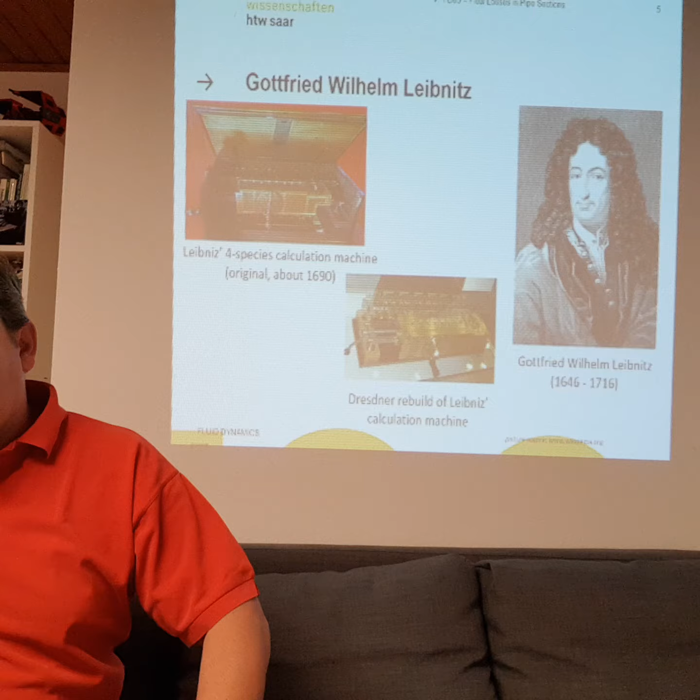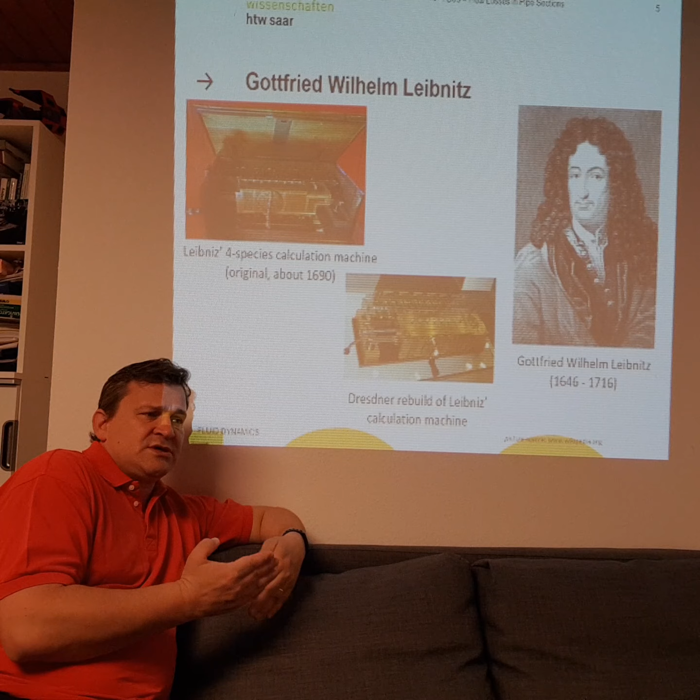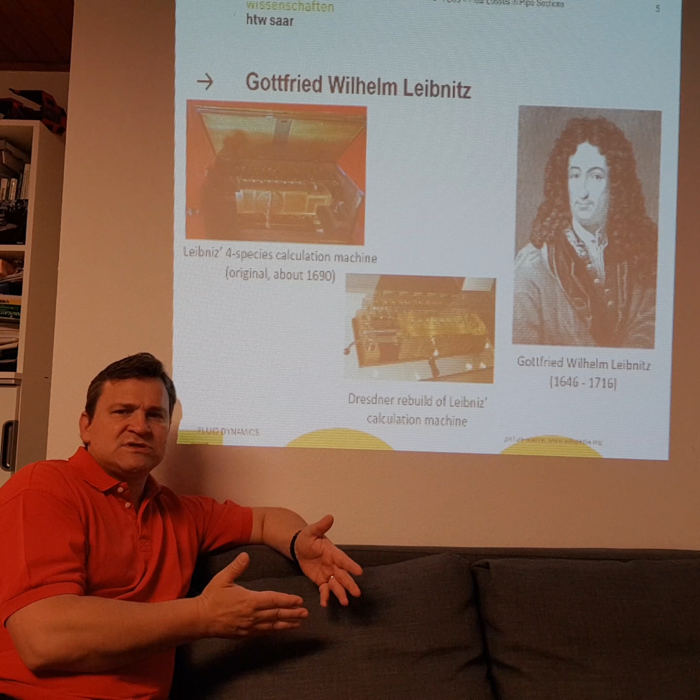I also want to mention Gottfried Wilhelm Leibniz, because he made the same discovery as Bernoulli. He also discovered Bernoulli's law, but it is named after Bernoulli. For example, Newton's law is named after Newton because he discovered it, but sometimes other scientists at the same time discovered the same effects in nature and formulated the same laws, so we should also mention them.

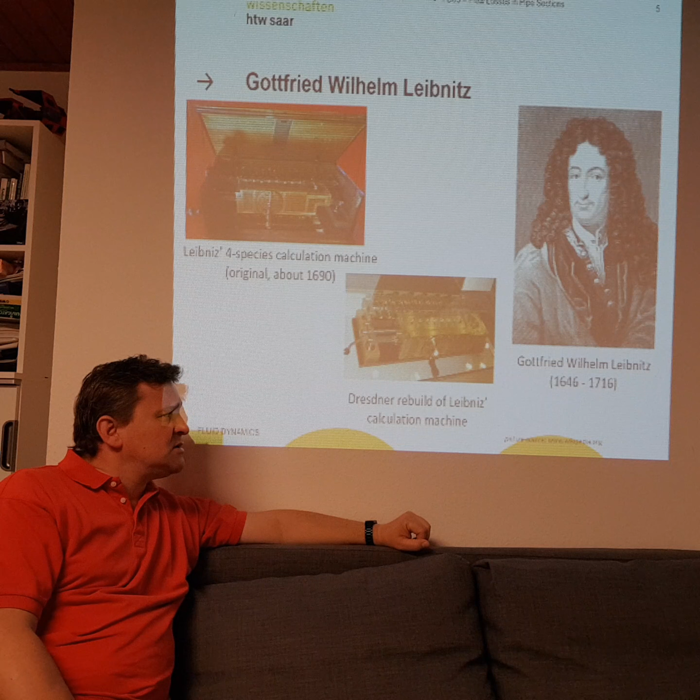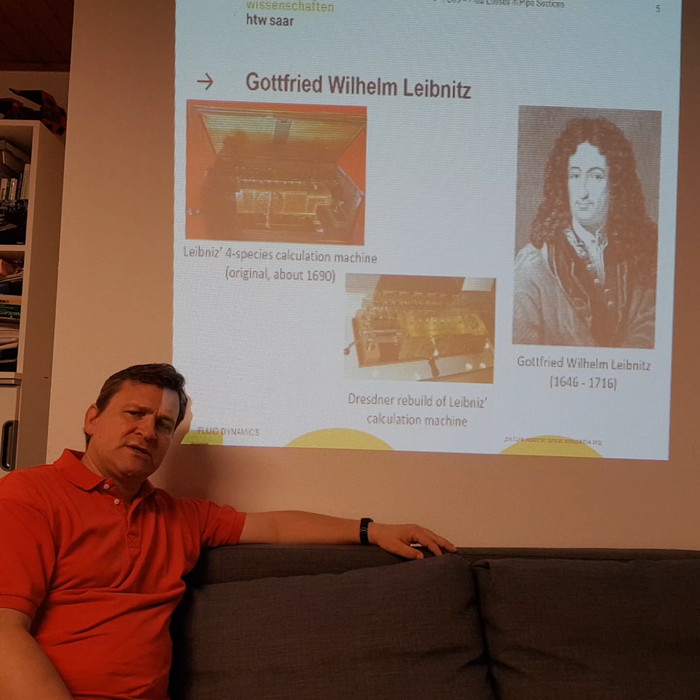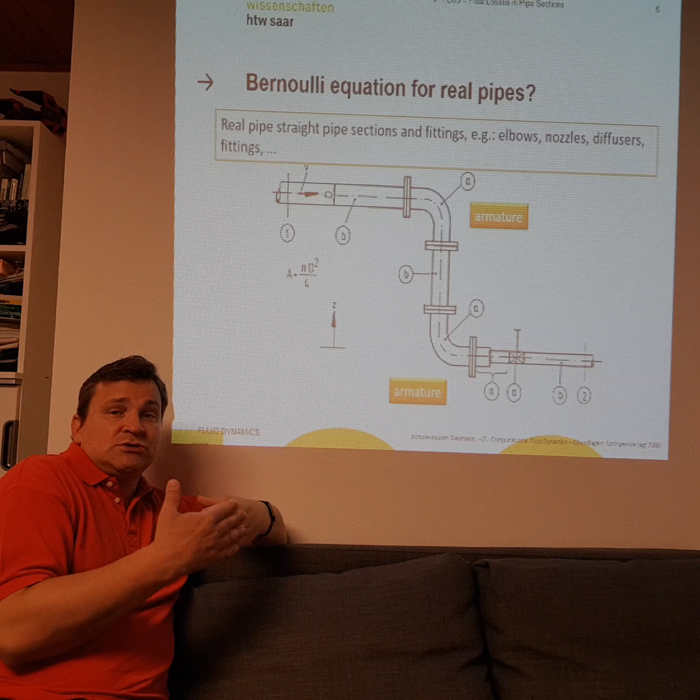But if you closely look at this simple pipe system, you will see elbows, armatures, and different pipe diameters, and all these constructional features cause a pressure drop inside the fluid.

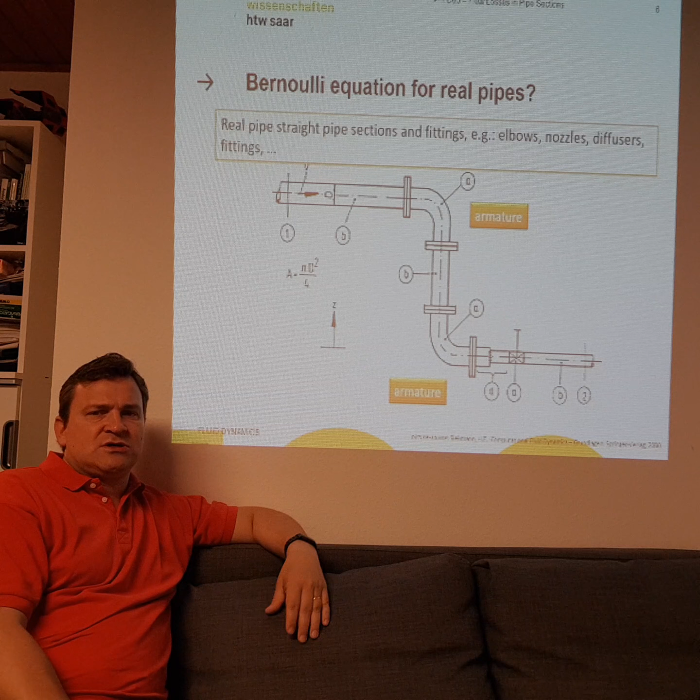This pressure drop is a loss of energy, so you have to look a bit more closely at Bernoulli's law and formulate it a bit differently. You have to add a loss term to the energy equation, and that's what we now want to do. It gets a bit more complicated to explain.

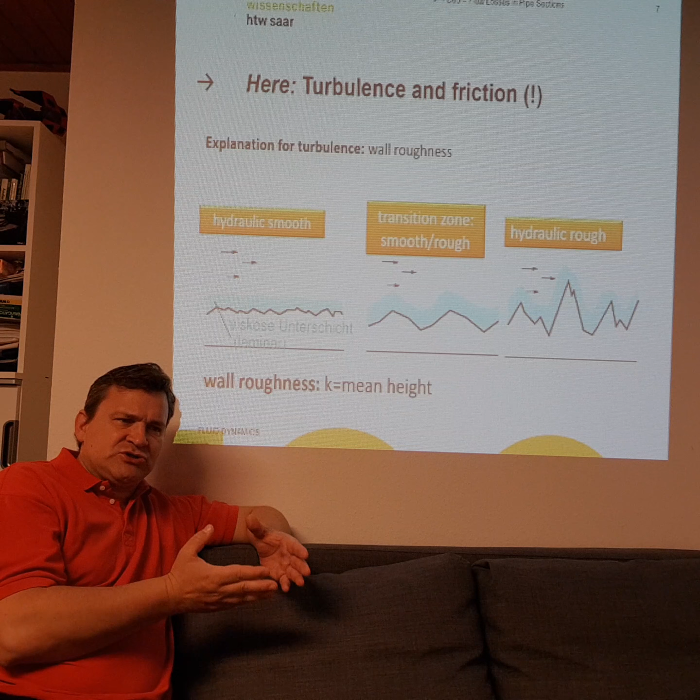You have the armatures, the valves, the changes of diameter, and all these armatures or valves cause a pressure drop. So we need a term for this kind of pressure drop.

But we will also have an additional pressure drop caused by the roughness of the walls. In the last chapter I taught you about smooth walls, and also in ANSYS CFX we only did calculations for smooth walls so far.

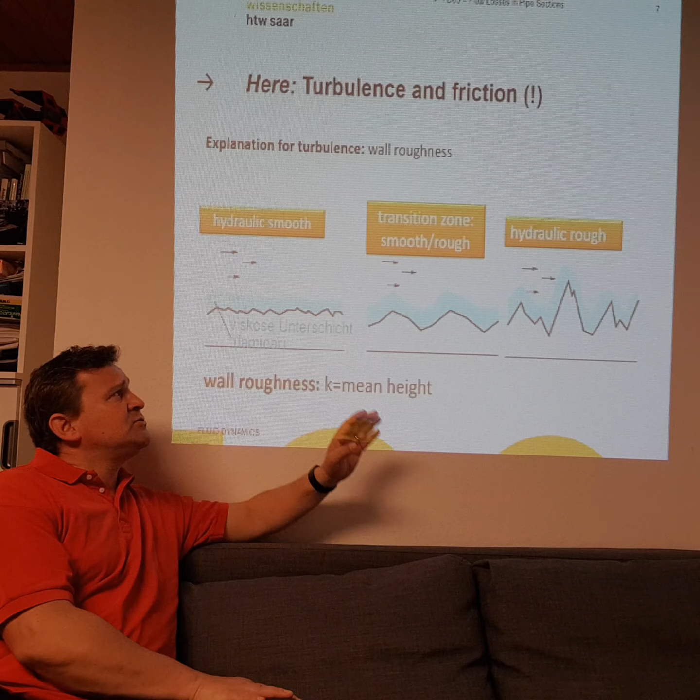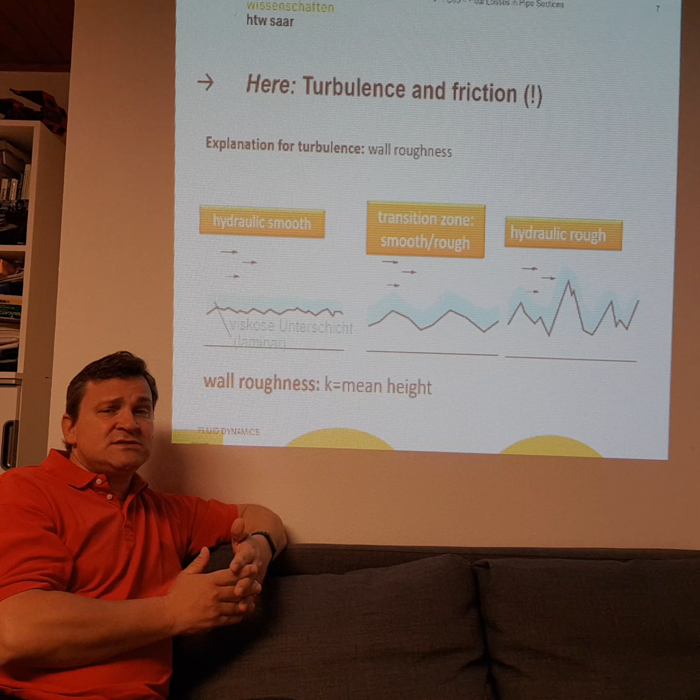But if you look closely at the walls of a pipe system, for example, you can have concrete in a wastewater system, and the walls can be really rough. You can have stones or edges on these pipes, and this roughness can also cause pressure drop.

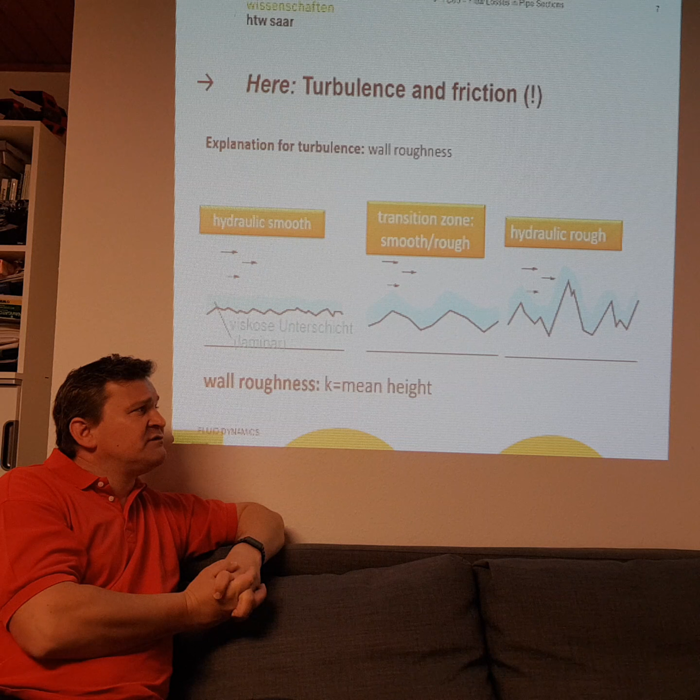It can cause a loss of flow energy, but there's something more I have to explain: it will only cause a loss of energy if we have turbulent flows. Now, what are turbulent flows?

You can have laminar flow fields, where the fluid flows without any disturbance, without any big gradient in the velocities. But you can also have swirls and turbulence inside the fluid, and these swirls and turbulences will cause pressure drop if they interact with rough walls or any armatures inside the pipes.

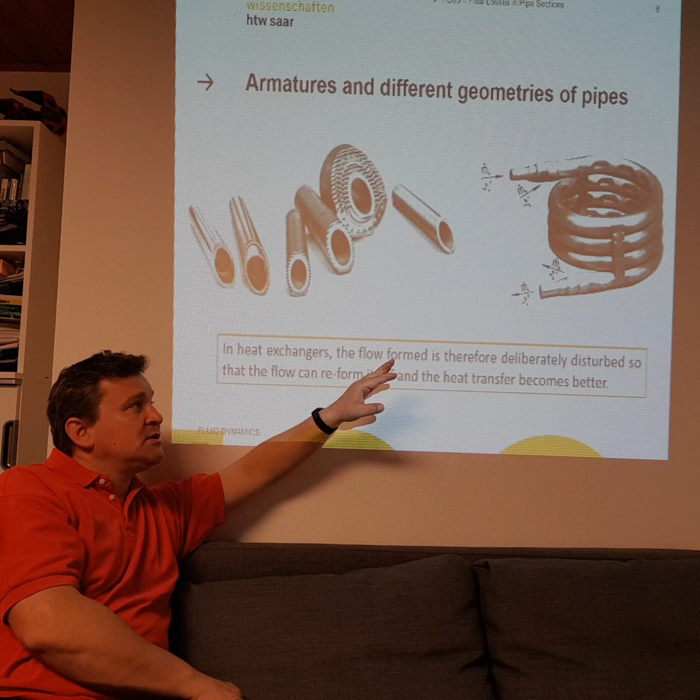And here on the right side you see a pipe for heat transfer. You will have a mass flow of warm water that enters the pipe, and you will place this, let's call it a snail, inside a pot of cold water, for example, and then you can heat up the water.

If you look closely, maybe if the video is not good enough, look at the slides. If you look closely at this pipe, you can see there are small bumps inside it, made to force turbulence inside the fluid flow.

So you will get better heat transfer, but on the other side you will get more pressure drop, and you have to pay for this pressure drop. It is expensive. Pressure drop always costs money.

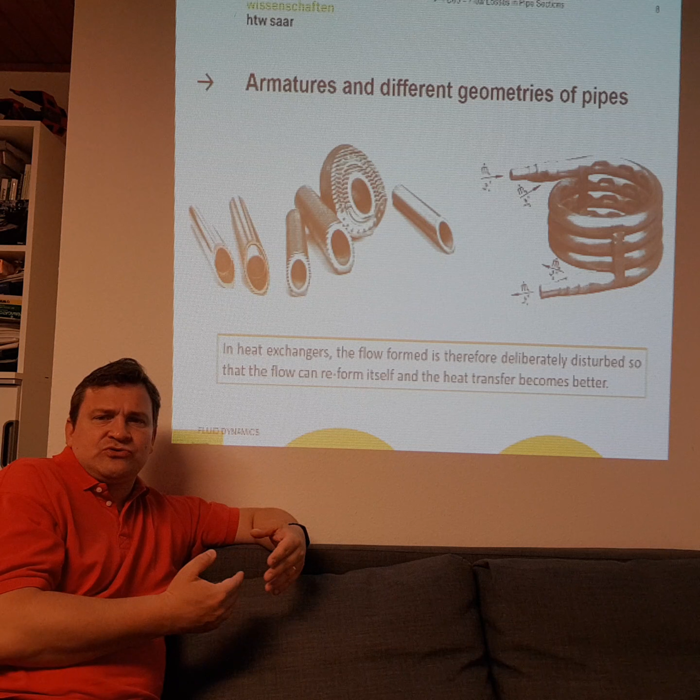For example, you will need a bigger, more expensive pump if you have a pipe with a higher pressure drop. So you have to pay for it, and you need more energy to get higher pressures at the entry, because you will have higher losses in the system.

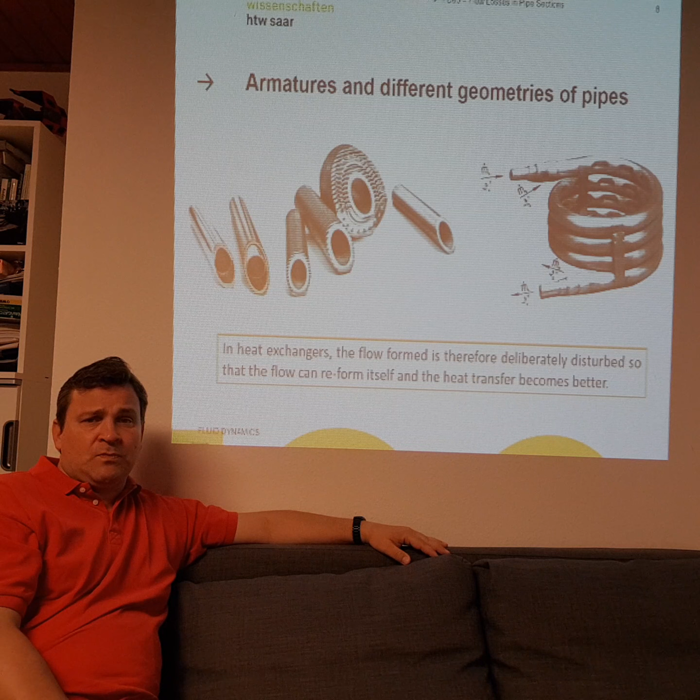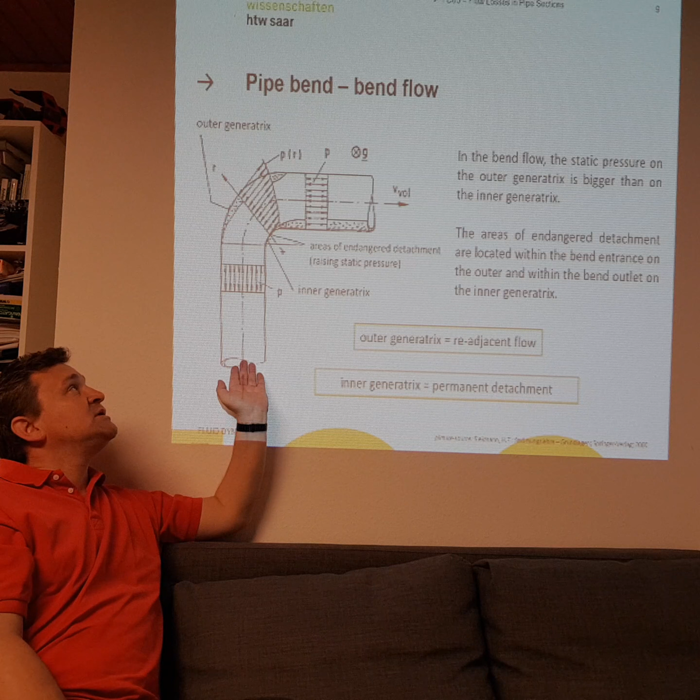So here you see a sketch of the elbow. You enter the water into this elbow system, and the flow will go around the edge, around the elbow, and after the elbow you will always have turbulent regions where turbulence happens. These regions will cause high pressure drops, and because there is a pressure drop, they will also produce regions of low pressure, and that's something I always try to teach you.

Also Bernoulli's law acts in these small regions. If you have high swirls and high turbulence and high mixing velocities, the pressure will go down, and you will sometimes have really narrow pressures in this region. In a normal water system you have around 3 bars, but in this region you can have much lower pressures. And what happens if you have water and the pressure gets lower than 0?

Will you have negative pressures? No, of course. Negative pressures do not exist. If the pressure goes into the region of 0 and goes lower than the saturation pressure, and the saturation pressure of water is really narrow, it's only about 2100 pascals, that's nearly 0 bar. And if the pressure goes lower than this level, you will have a new physical effect.

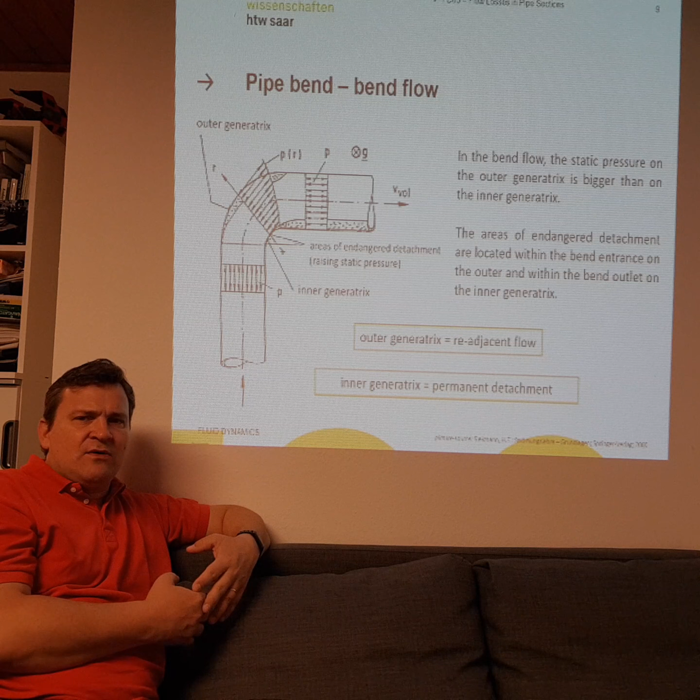You will have the effect of cavitation, and cavitation means you get bubbles, you get holes in the liquid, and it will be filled with gas, for example with water as a gas. You will see these bubbles, and that's an effect I want to talk about a bit later again, but it's a really important effect.

So if you calculate pressures with Bernoulli's law and you get pressures lower than 0 in a region, it is not physical. You can calculate this with Bernoulli's law and you will get negative results for the pressures. It can happen, it's only mathematics, but it is not physically true. In this region where you get negative pressures, the physics will change, and you will get an additional effect of bubble building, and that's something I have to look at closely in the next slides.

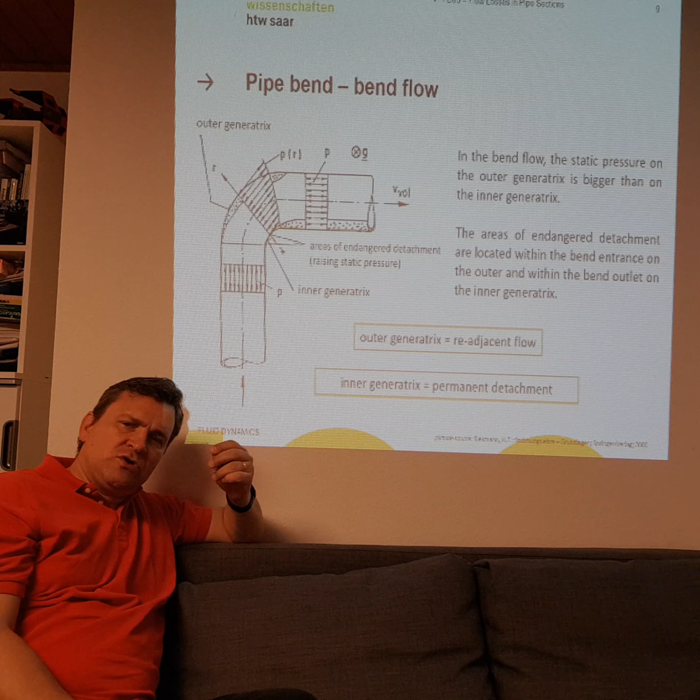Okay, and always when I try to explain something, I love to take CFD results, and there is a really interesting CFD result called the elbow case. Maybe we do this exercise also in CFX. That's a result from a famous open source CFD code called OpenFoam. I also give lectures in OpenFoam, and that's a really famous example.

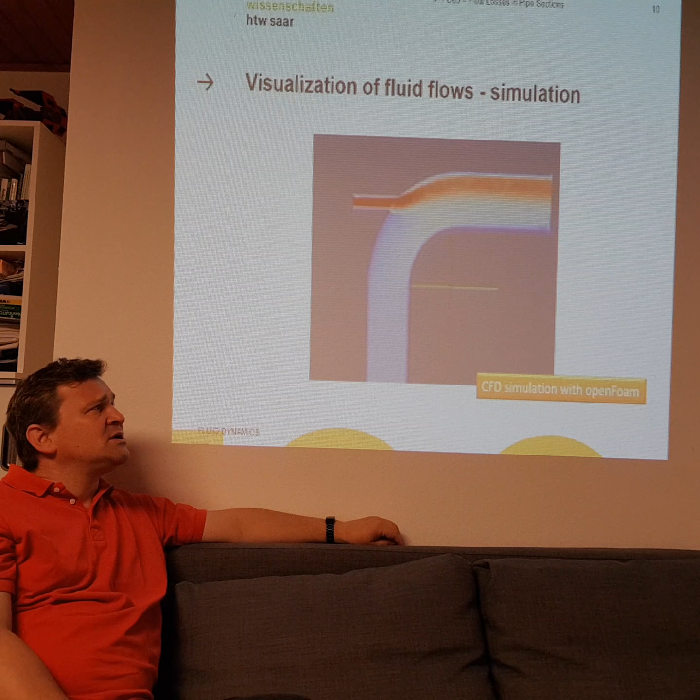It's a so-called elbow example, and here you see cold water that enters from the bottom, and there's a small additional pipe, and water enters from this additional pipe. At the exit of the elbow pipe, there will be mixing between the red hot water and the blue cold water, and you will see turbulence effects. In this simulation the mesh was not so fine, so you can't see any big swirls, but you see the mixing of the red, white, and blue colored water.

And I always try to build up a bit. I'm a fan of building up these experiments, and what I did here was the first version of my model. I built a small channel with water and a small pipe, and I injected some ink with blue color, and if you look closely you can see how the ink enters the pipe system.

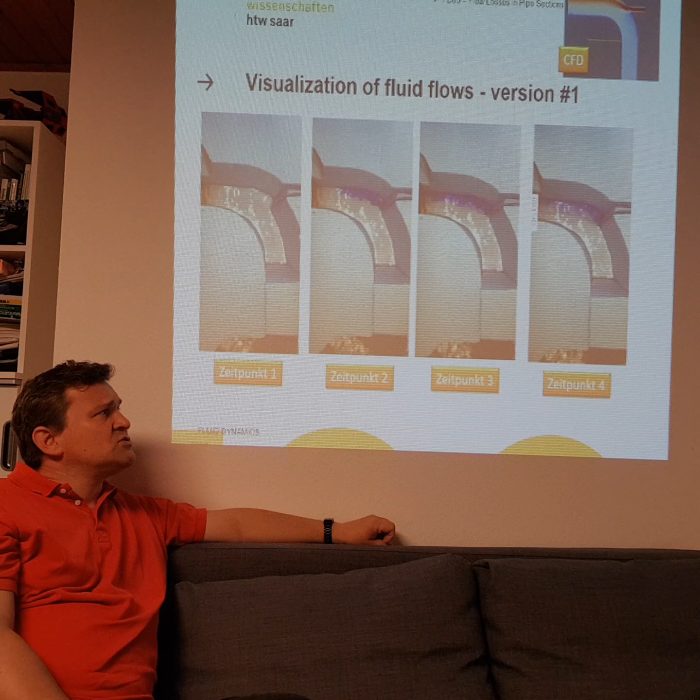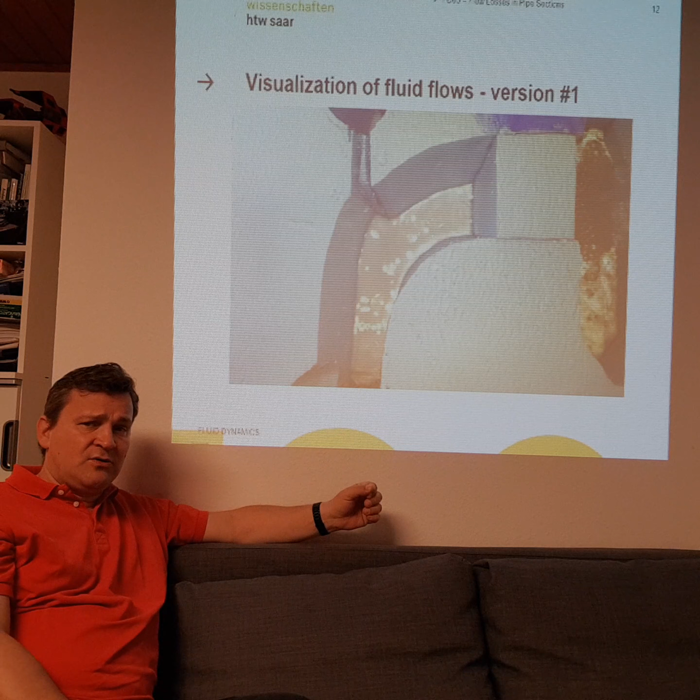But this was only the first version of the model, it was not so sophisticated. Here I also embedded the movie, but I will not start it. You can find this movie also on YouTube and look at it in much better quality on your own.

But I also wanted to build an additional model, a second version. I built it a bit more sophisticated, because it was a bit messy to take the ink and inject it at a special position, and it was a bit difficult to do. So I came to another idea.

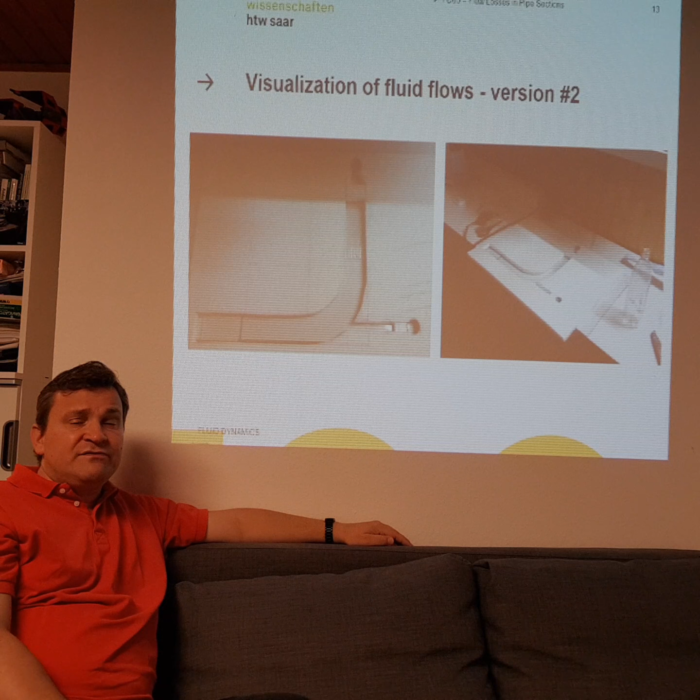I injected cold water and hot water, and then I took an infrared camera from FLIR, and I made some movies of the heat. If you take this infrared camera, you can really well see the injection and the mixing of the cold and hot water stream. And if you look at the third or fourth time step, you even see swirls and turbulence inside the fluid. This was a quite interesting result for me.

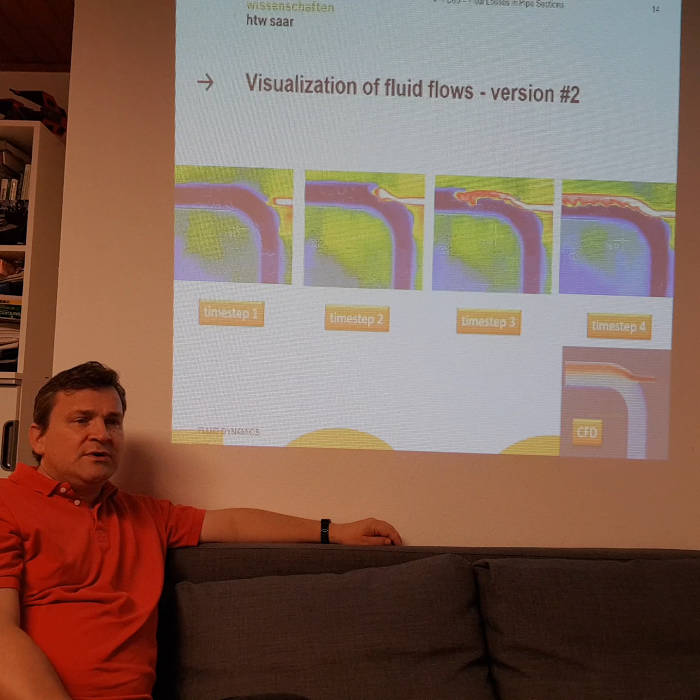Okay, and that's something we will also explain a bit better. But please take into account, if you have turbulence, if you have swirl, you will also have a pressure drop. This turbulence effect, the swirls inside the fluid, cause a pressure drop.

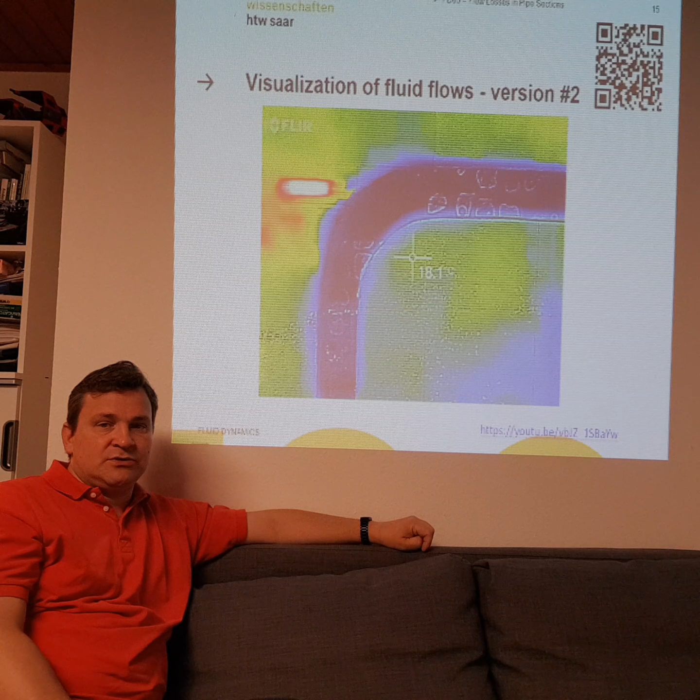Okay, so what is turbulent? What is laminar flow?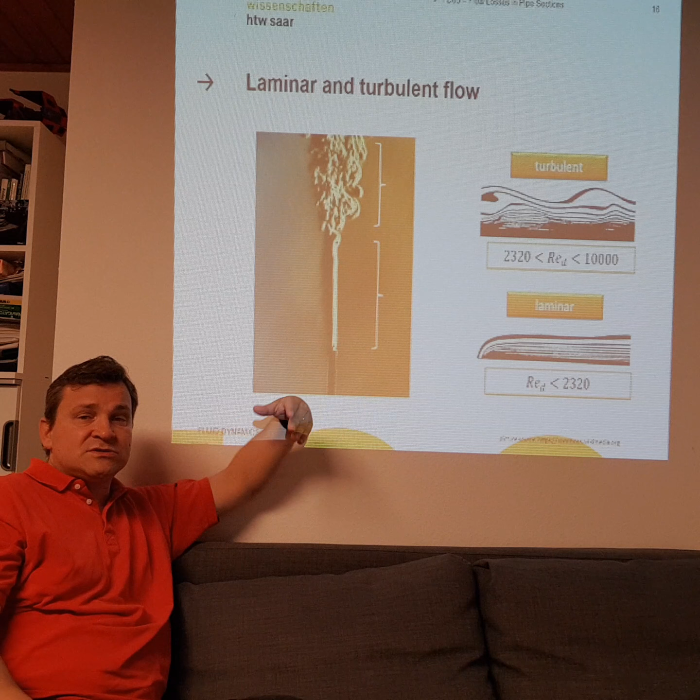Here is also a nice picture of a flow, and this is a small candle with a flame. The candle flame will cause a higher temperature of the air, heating it up and causing a rise in temperature. This causes a higher velocity, and the air flow will go upwards because of the lower density of the fluid. At first, the fluid flow will be really laminar, but after a defined length, the flow will become turbulent.

That's the same effect that happens in the pipe I showed you before. First we have laminar flow, and after a special length the flow will be turbulent. And if you have turbulent flow, after some time it can become laminar again. So you can change from laminar to turbulent flow.

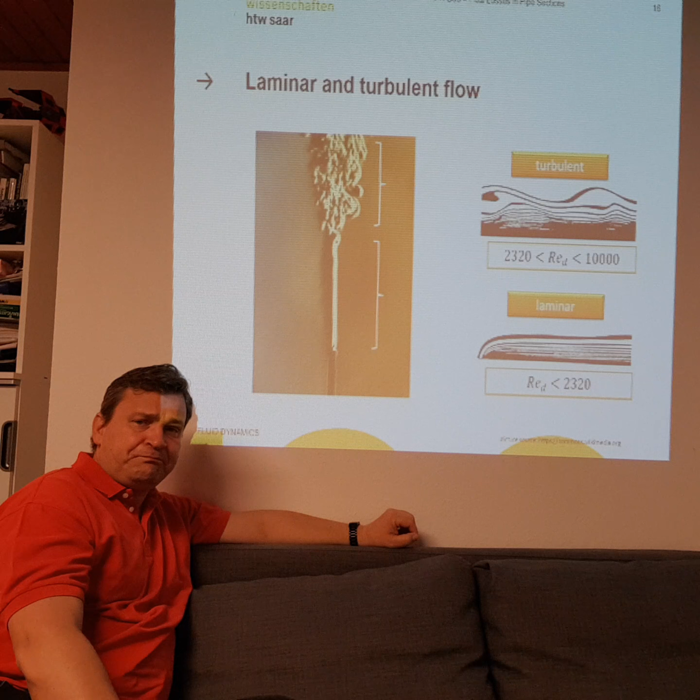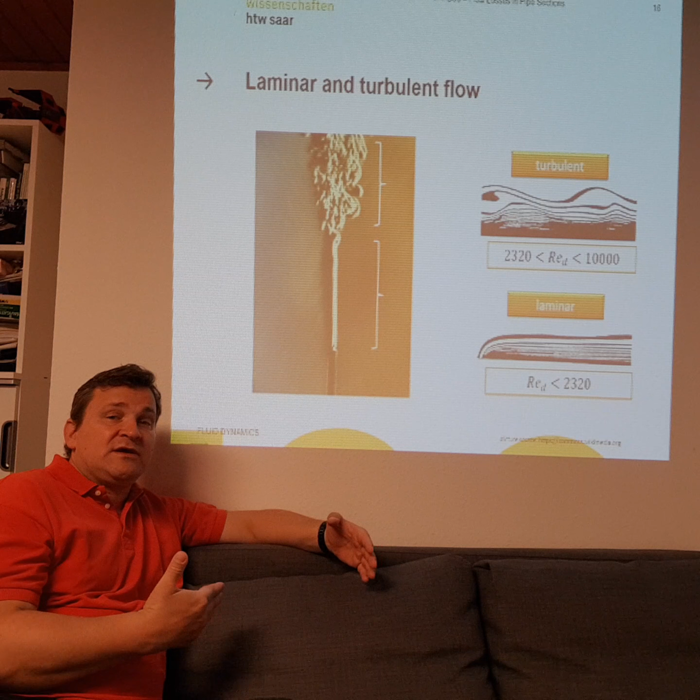There's also a really important number you should never forget, the so-called Reynolds number. The Reynolds number tells you if a fluid is laminar. There is a magic number, 2320 — if the Reynolds number is below 2320, you will have laminar flow. We calculate the Reynolds number as velocity times density divided by viscosity of the fluid, and if the Reynolds number is higher than 2320, we will have turbulent flow. So with this number we can calculate whether the flow is turbulent or laminar.

I also want to mention the famous scientist who formulated these laws: Mr. Osborne Reynolds. He lived from 1842 to 1912, and here is his formulation of the Reynolds number. The Reynolds number has no units — it is density times velocity times a characteristic length, divided by viscosity.

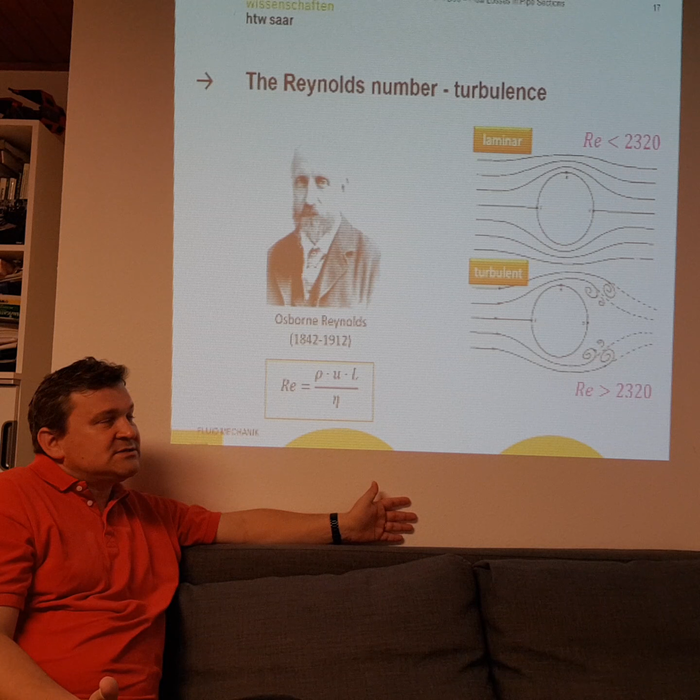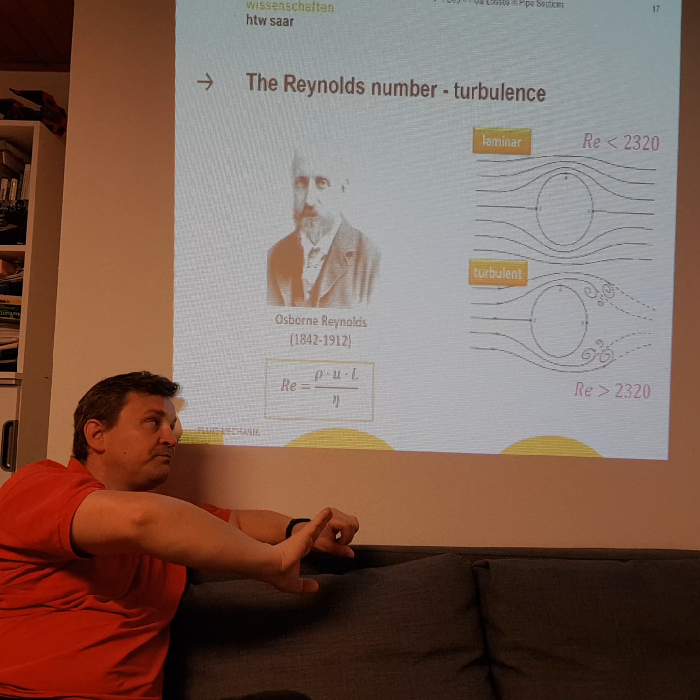What is this characteristic length? For example, if you have a round object like a ball, you take the diameter of the ball as the characteristic length scale. Or if you have a pipe, such as a heat conductor, and air flows directly over this pipe, you take the diameter of the pipe as the characteristic length scale. You can also formulate this for flying footballs — you take the diameter of the football.

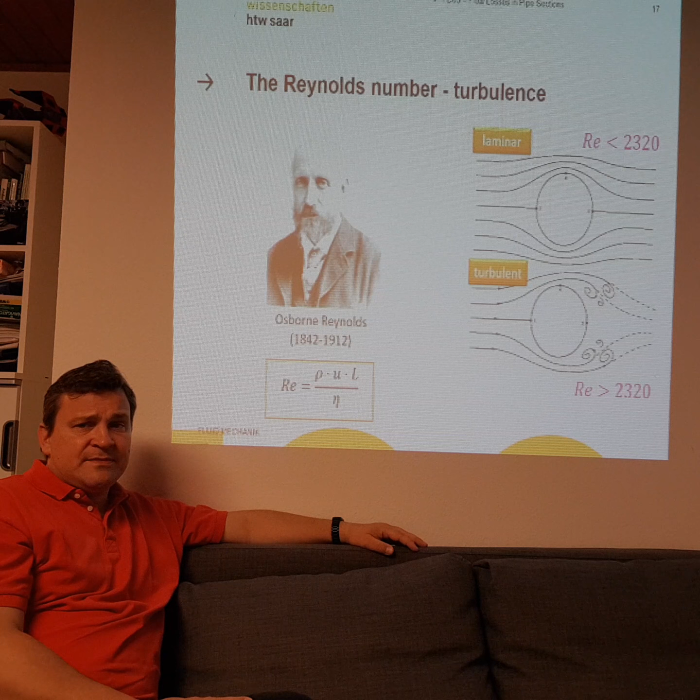Now you can also calculate the Reynolds number around the ball. If the Reynolds number is lower than 2320, you have laminar flow around the ball, and if it is disturbed you have a Reynolds number higher than 2320. You will always have high Reynolds numbers with high velocities or big objects, but lower Reynolds numbers with higher viscosities. For example, in honey you have lower Reynolds numbers than in water or air.

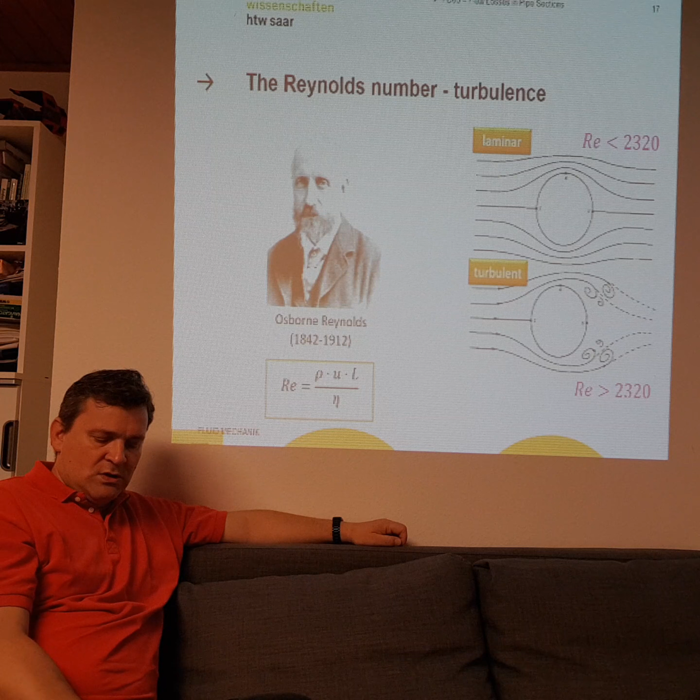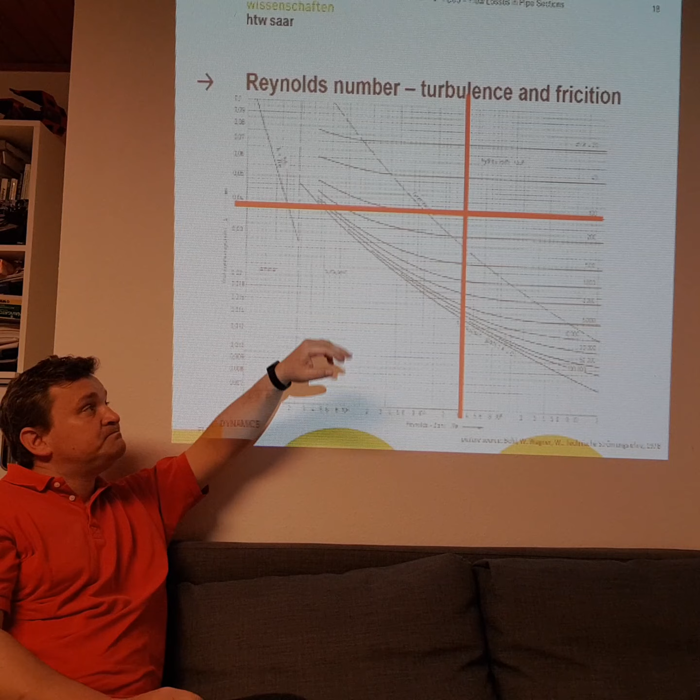I made two lines inside as an example. So if you want to solve an exercise — for example, to calculate the pressure drop inside a pipe — you first calculate the Reynolds number inside the pipe, and you know if it's laminar or turbulent. Then you draw this red line, look at how rough your wall is, and then go to the y-axis to read your pressure drop.

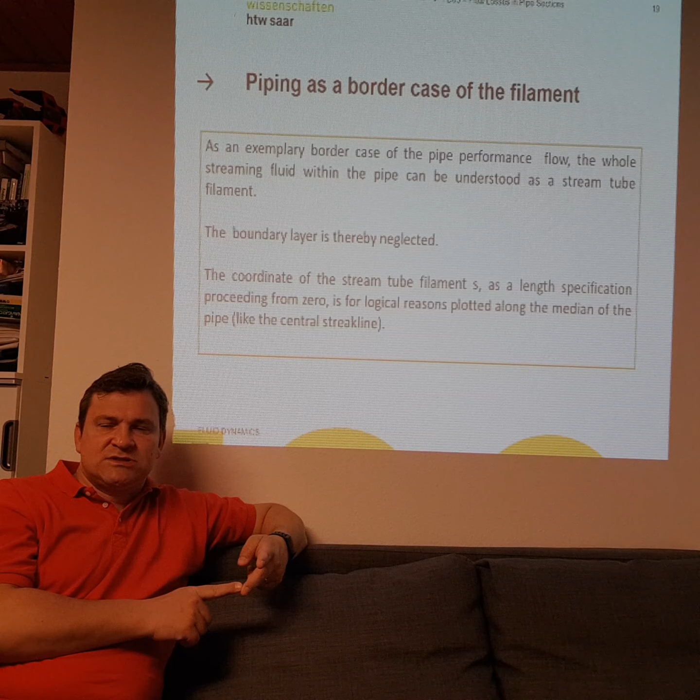Here's some conclusion: the pipe is somehow what we neglect in this whole calculation. So you can calculate pressure drops and losses, but you will neglect any kind of boundary layer formulation. You will not be able to calculate boundary layers with this filament theory of Bernoulli's law.

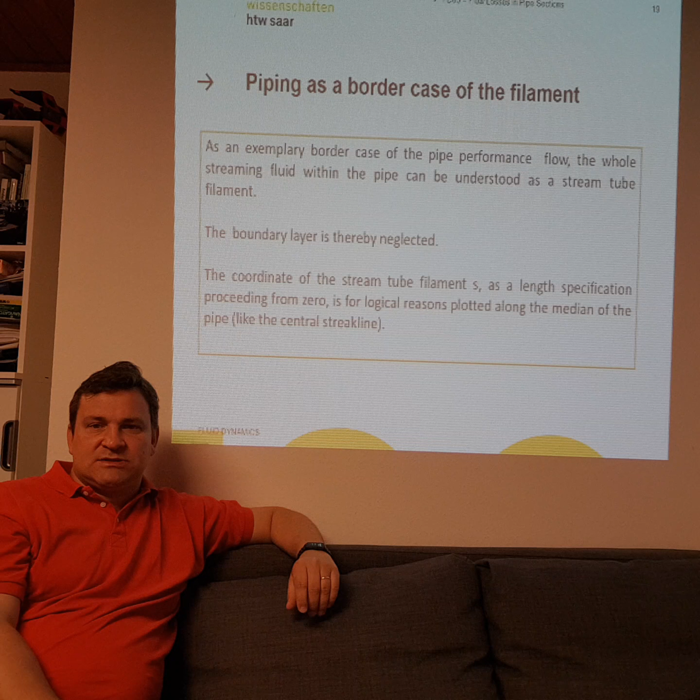If you want to go more into detail and learn something about boundary layers, you have to make a detailed CFD model with a good resolution of the mesh on the walls, and then you can make these more sophisticated simulations.